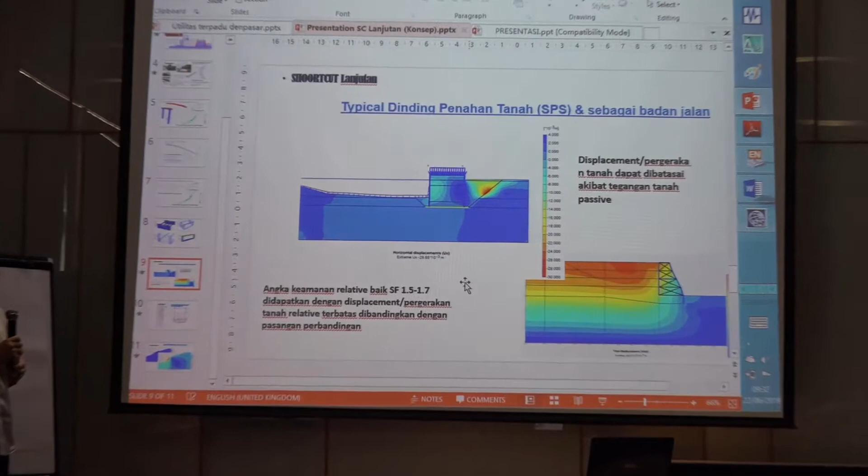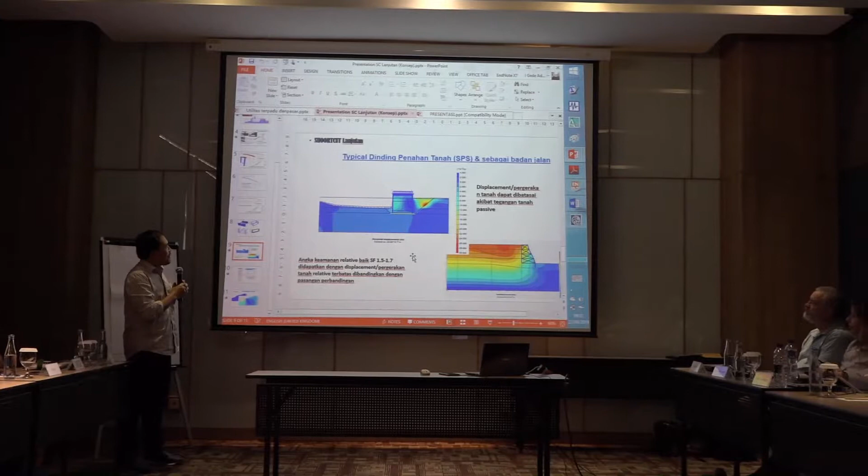Technically, we try to provide the stiffness of a structure. If you look at the basic structure, we also fill in another material, the soil itself, which provides more stiffness.

When we calculate this, the load comes from the lateral load, coming from outside, from the horizontal direction, brought to the structure — meaning the structure has to resist lateral loading, or horizontal loading.

That's the main point. But before that, if we have a frame, we already have a structure. Now the interaction between the soil and the structure itself, and another factor right now is water — that interaction brings more complication.

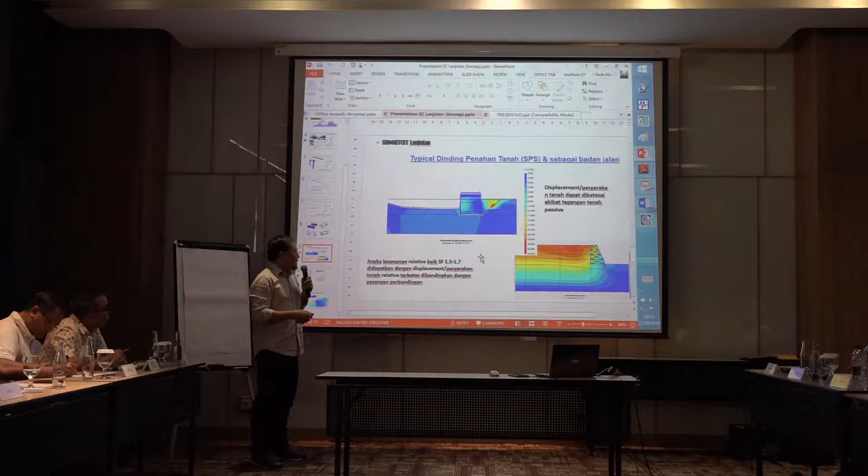We've got software from Europe, from America, from Australia. I think it's quite a massive help for us to explore more about the interaction between the structure itself. Right now, the main point is if we have a vertical load, actually to provide better solutions if we have a lateral load versus a gravity load. We have more loading to the ground, and then the lateral load is much more easy to resist by the structure. That's the main point of this one.

Now, technically, if we look closer regarding the foundation and the deformation we get, that's a different way to look at it. Sometimes we provide another material, like what we got here from Lorry. We bring in another material, like a synthetic material, geotextile, to provide strength, shear strength to the soil, and it would bring another resistance here. That belongs to different cases.

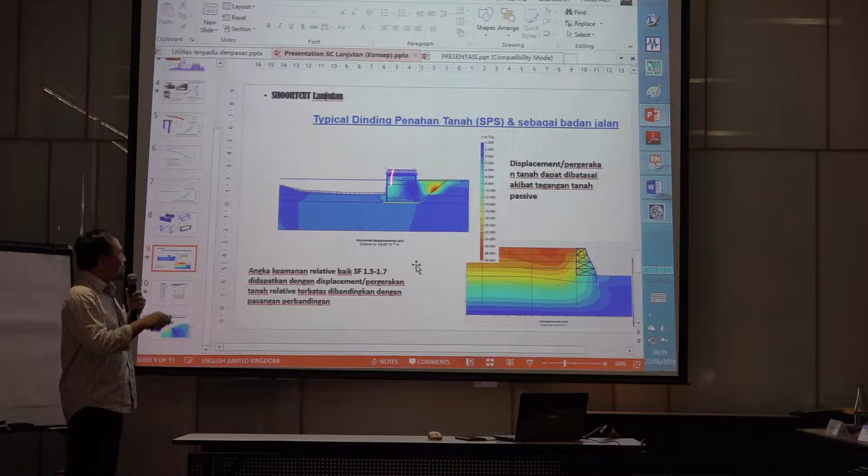For example, here we have a safety factor. That's the stability of the structure, which means the capacity of the structure, represented by a safety factor. The requirement of safety factor for a retaining wall, for example, we just provide 1.5. A bit more than that will bring us to a costly solution - it should be more expensive than we expect. So if we use another safety factor or a limited safety factor, it's a different solution. A bigger safety factor we provide, of course, gives us a more convinced structure.

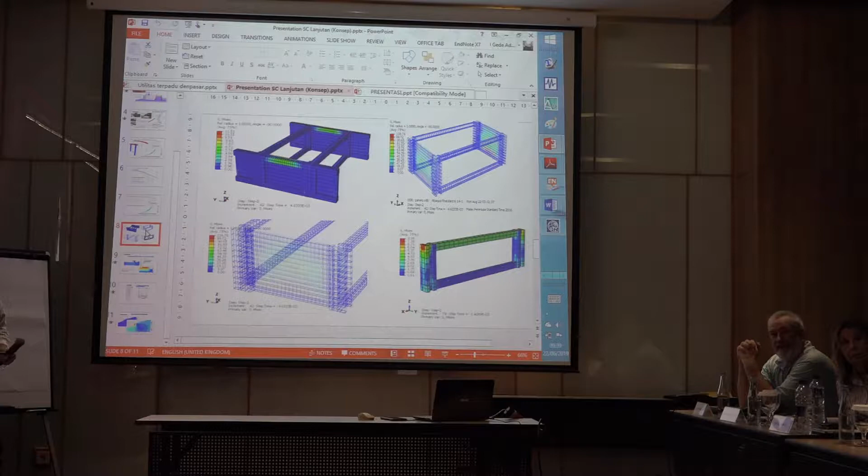So let's move to what we've got here. Now, technically, yes, if people have got any questions, don't lose the translation - we will get this translated, and if you're okay, I can translate. So is there any questions on this? Overall stability of the structure. Overall, yeah, okay. Let me bring it to more general language. Probably - oh, sorry about this.

If we have the structure, the capacity of the structure - let's see, if I stand here, and somebody moves toward me from the other side, I will try to resist that load. That's the main point. If a big guy comes at me, I might collapse, but I try to resist that load. That's as simple as that. So how can I resist someone moving to me? That's my capability or my capacity. We bring in the number here, which is like a standard, a requirement for the structure.

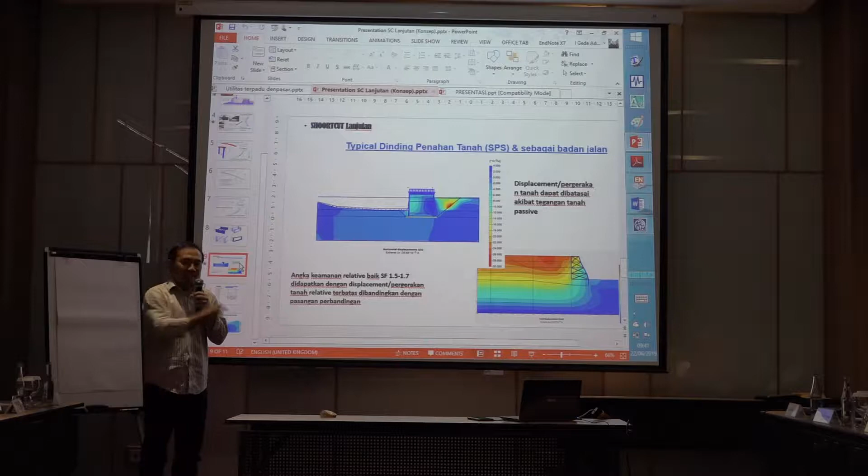Thank you for that. The SF rating, sure, yeah.

That's a good point, because if I look at another product coming in if we apply it to this structure, another advanced material, another advanced collaboration like the analysis as well - we have another opportunity to bring into this structure. If we want to increase this, hopefully it's not more costly. We expect we've got a better capacity, better safety factor, but hopefully we just stay at that cost - I mean, not more expensive than we expect. So hopefully good material comes to this structure.

Hopefully that doesn't increase the cost. Actually, that's a good point as well.

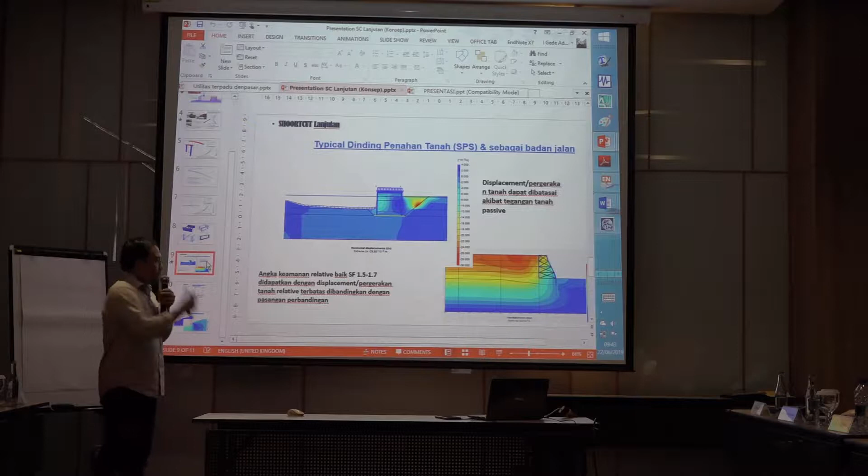So we apply this kind of system with the solution in mind for cost as well as social factors, as Alan said. For example, right now in Bali, we try to provide a solution as a breakwater. We didn't expect to get boulders from natural resources, and we found it's limited now - there's no more big boulders to be put along the coast because they're not provided and not available. So we try to bring this as a solution, and we've done a study on this that we can share. I'll bring it to Alan, from a study about 2-3 months ago in the lab, but I didn't bring it right now, so we'll share it later.

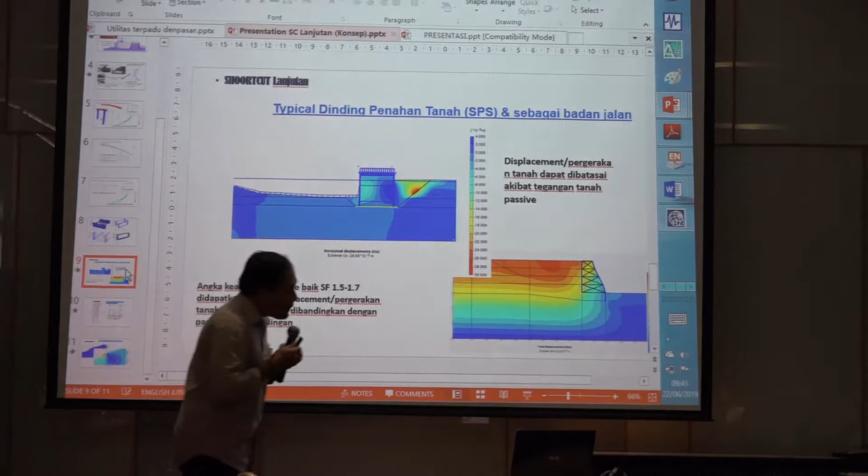So what I'm hearing is the answer is yes, but it comes at a cost. If the cost can be controlled, we need to control the cost. Surely, if we use advanced material, sometimes we go beyond the cost, and then it's probably not quite a good solution. So I think so.

So on the same subject, regarding the safety factor rating - what would that typically be for a gabion or a sheet pile structure? What rating would they be achieving in a traditional installation?

If we compare - you mean a comparison? Yes, so if you have a gabion structure from 10 years ago in Bali, what rating would they have achieved or claimed originally? Okay, that's a great question, because we try to provide a different solution from the existing one. Is that right? Yeah.

The existing solution sometimes has limitations. Like I said before, if we find limited resources to be put as a retaining wall, we try this solution instead. And sometimes, depending on the case, the structure will be a risky one. For example, on a really steep slope of soil, if we put a typical gravity structure, it won't work properly according to engineering requirements. That's probably the background - if this structure is put in, it provides a solution for this.

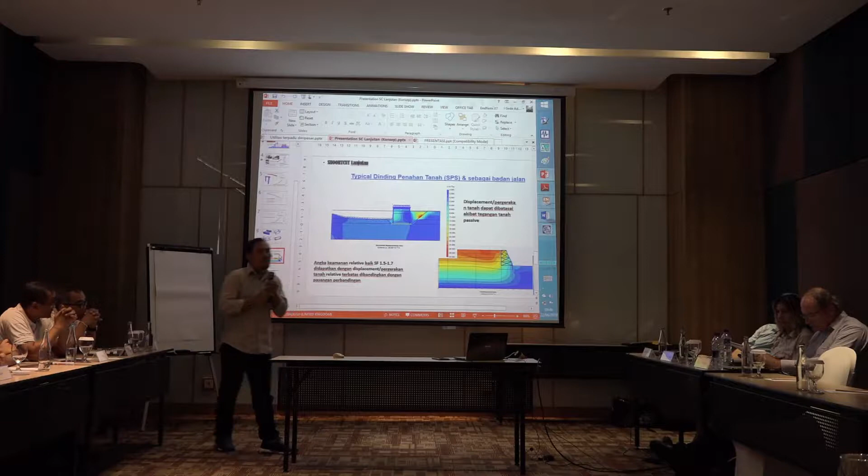Anybody else? Before we continue?

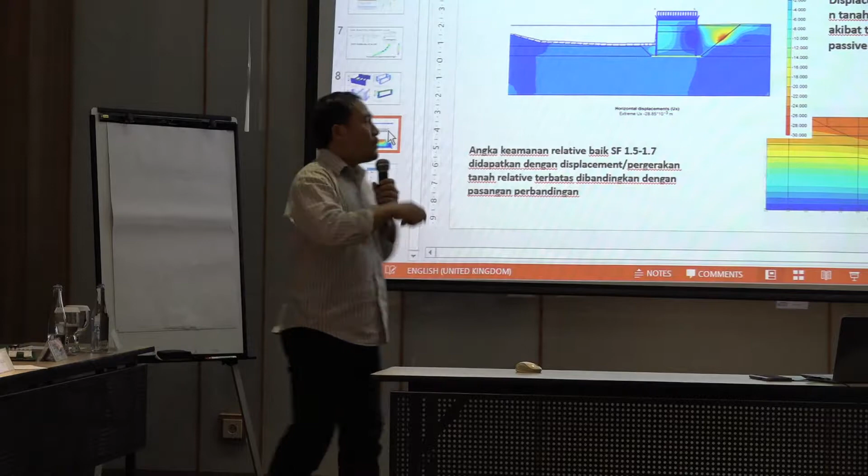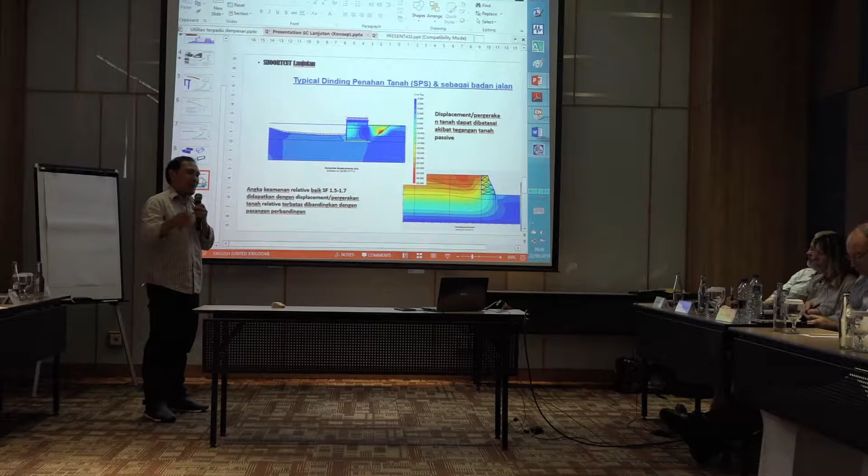I'll try to add, because my colleague is really an expert in soil matters, because this structure depends on soil interaction - the existing soil will make the structure behave differently. It really depends on the soil. So for the safety factor, if we provide the same safety factor compared with SPS, we've got probably the same outcome, however we have a lighter structure, a more reliable structure in terms of stiffness. Sometimes if water will cross or transport from one side to the other, it's a different analysis. The gabion allows water intrusion fairly well, but here, if we want to protect water from coming across to this side, this will help more than the other option. So it depends on the case - we don't expect all cases to need an SPS solution. Not really, but this one is better for certain situations. We try to compare apple to apple, and sometimes it works better, sometimes it's more expensive, and then we might choose another one if this system is more expensive.

To try and compare the two is difficult. A gabion structure with the same safety factor might have twice as much bulk, so you can't just look at one against the other without considering what's going in behind it. For a pile or sheet pile structure, it's quite different again - the piles might have to go, say, if we're going 1.5 metres into the ground, the piles might have to go 5 metres into the ground to obtain the cantilever effect they produce. They're very difficult to do a straight comparison, I believe.

You can do it obviously, but what we're doing here is so simple compared to the other structures. The Gabion structure takes probably a lot longer, I would think, because you've got to carefully place the stones within the cage. In fact, we climbed over a Gabion structure yesterday supporting some of the upper embankment. It's been there for some time, but not down at the lower level, so it's a difficult comparison to make. You've got to look at all aspects. I'm surprised that the safety factor is only 1.5 to 1.7, because the engineers I work with are probably three times that, and they're very cautious.

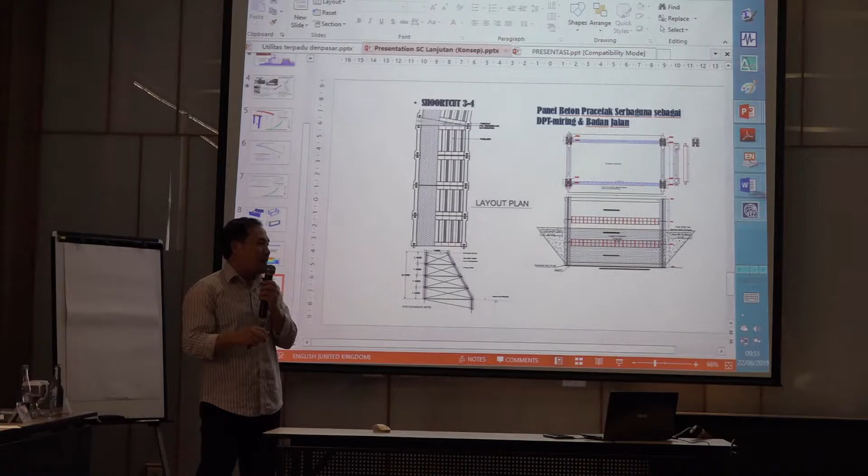Alan made a good point, because this system provides concrete material, which is precast, and the durability of the material itself is quite better than others. For example, let's say the cage of the Gabion lasts about 15 years as the durability of the material, and then corrosion comes up, and the Gabion probably is not working well at the hazard water, like chemicals sometimes. But hopefully this one, because they have a deck, a concrete cover, that's probably a better solution for a hazardous environment. So it's better for that one as well. A longer durability of the material probably takes time, and if you compare the cost, the initial investment up front costs a little bit more, but if the longer structure is a durable structure, this will last longer. It's probably a good solution for the cost as well.

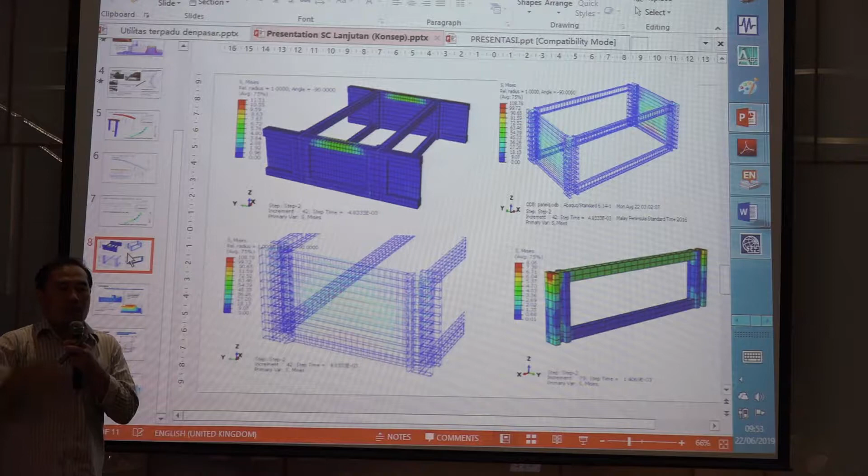This is actually a great thing to show us how the strength, how the stress is working inside of the structure. So we try to go deeper into what Mr. Angara brought us as the challenge here. This was not working as we expected, and we didn't expect to bring you this. So we tried to get inside of the structure. Color provided the stress at the rebar, at the concrete itself. So this brings us confidence for the structure. I think it's a good outcome for now.

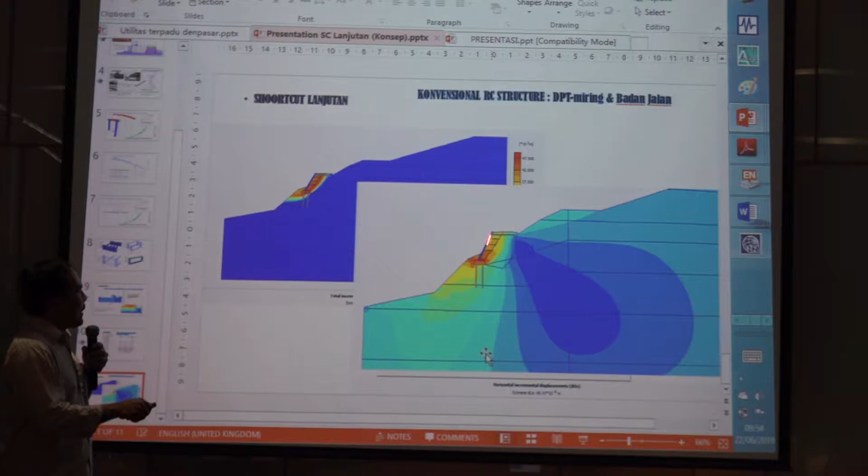Now, if we compare something else, this is a technical comparison before we get into the economical side, like the cost and everything. Last time we had a different structure, using a conventional retaining wall, using concrete and piles. So the method is really hard, and the cost is quite high, sometimes much more expensive. And that's why SPS is suitable for this kind of structure or the problem here.

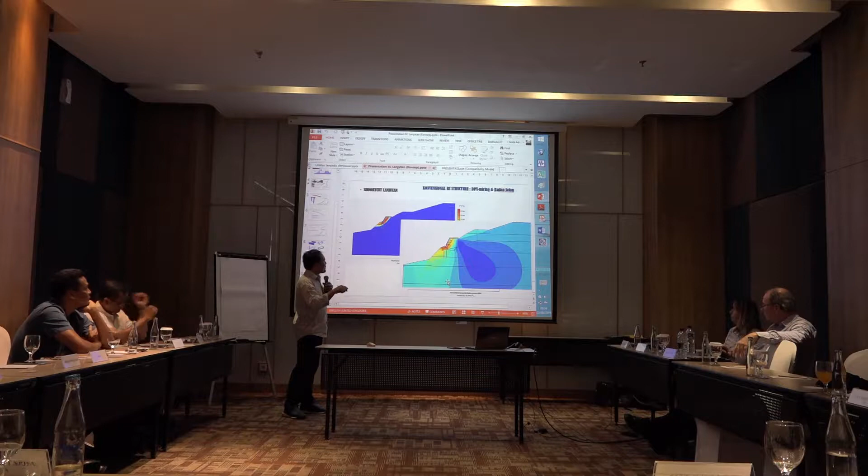So this is the route. The main route will be along that side, perpendicular to the plane, and this is the structure. If we have a good solution for additional land to be built, it's a good solution for the social aspect as well. So I think this is the main structure as SPS, and it's worked up to now. That's a good point as well.

So right now in Indonesia, they're trying to get a specific standard, what we call a standard. They're trying to provide the standard for SPS right now. I mean, the SPS team tried to contact the authority to provide the specification in order to bring SPS to be constructed all over the Indonesian area, so they get the standard, sign, or stamp from the government. If they get it, I think the consultation is already there. It means we just need to provide monitoring or control of the structure.

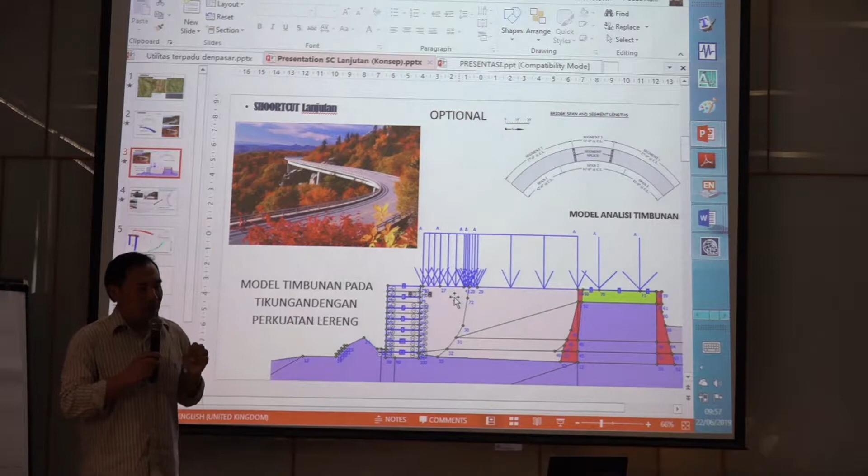I mean the previous structure, or the structure installed last, we try to provide control and monitoring. The result of the monitoring we need to provide to the government, and they will stamp it, and then the government asks the industry audience in Indonesia to bring it into a solution for everyone in Indonesia. It's not just local in Bali, but probably they'll bring it to all over the Indonesia area. So I think it's a good point.

But what about... this is the case again. I'm very sorry for... probably you look at this one, that's better.

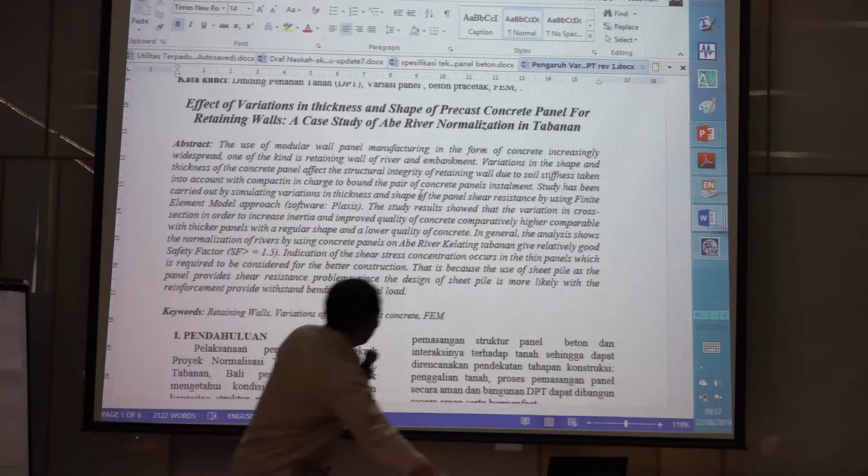Language for you, probably. We have an analysis or publication regarding the effect of variation of thickness and the shape of the precast concrete panel for the retaining wall of the river. Abe River is a good point for us. This kind of structure is put on the river bank. Actually, the river is about 20 meters wide, and we change this kind of structure. This is the existing structure to be put, and we try to provide another solution like SPS. So this is the comparison between the structures.

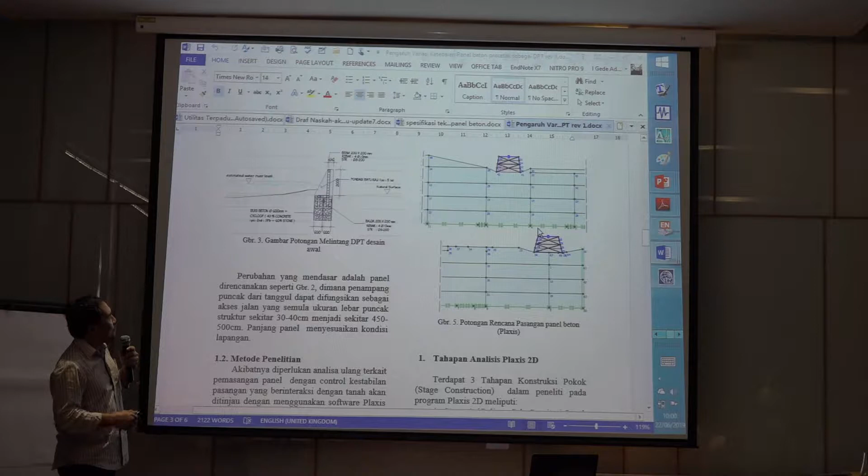Structure, as you've seen in Ali's slides, it's just like a hollow. It just looks like a hollow because of some panels, truss, cables and everything over there. So what is inside that system?

We need soil. Soil material will be filled into that system, into the chamber, small chamber over there, in that body. So what is inside the system? It cannot be just empty like this, so we need to put soils or any material.

A selected soil will be good, but we try to find the most suitable option. We can use any soils, just surrounding the area, the site, so we can use that as long as we have it.

Actually, we have some projects back then in 2015. The first time Anggara recruited me into this system, we had a proving ground in Karawang Regency in West Java. We tried to normalize the river bank. There's a problem over there.

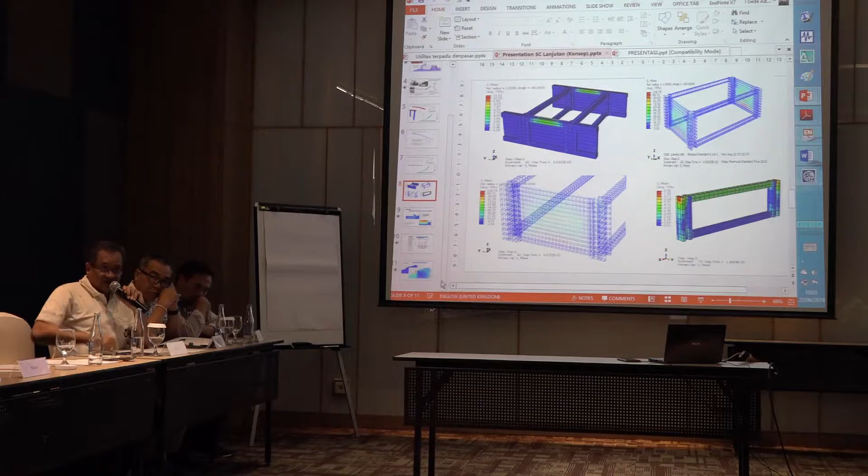So we talk about settlements. When we put this system on the soil layers, probably someday there will be a settlement. We cannot guarantee the system will sit on top and there's no movement vertically or to the other directions, X, Y, Z. When we talk 3D, we have thoughts about Z, X, and Y. So there probably is movement in that direction, and we need to know about that as well.

When we talk about this structure, I think my colleague Padi already explained everything, he's the man who knows the tiniest thing about this system, you can ask him. In terms of geotechnical engineering, to support this structure we need to know the sufficient bearing capacity of the soil that the structure will sit on. That's the additional thing we need to consider.

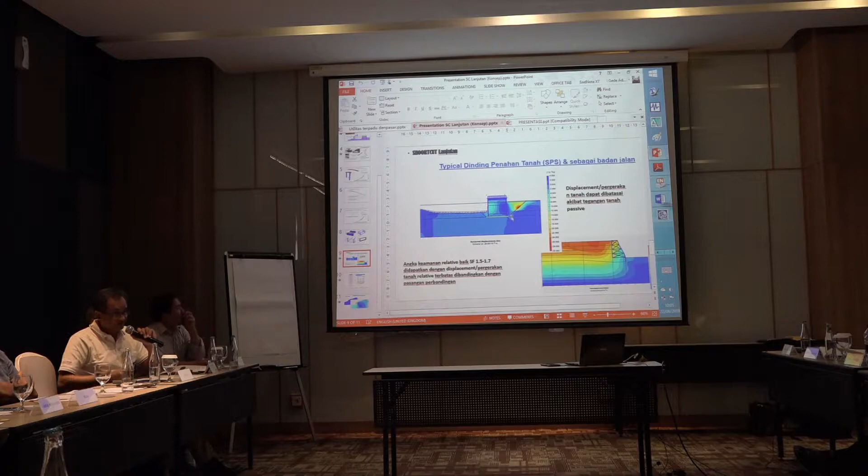And about the fill-in material we have - will you make sure I understand what you're saying? Do other things rather than make it wider. So we try to improve the soil layer, put geogrids, put piles and everything, so that can be done, so that we don't have problems.

So your solution will probably be an economic decision. Exactly right.

Other things about the key issue in this panel system, we need to compact the soil inside the box. The compaction is very, very critical because it's going to give the weight of the total structure and also to try to make it intact.

Because this cross section will continue in the long section to that direction, we need to make sure the weight of this block is similar, uniform along the long section. This keeps the stiffness of the long section, so it controls the tilt and also the differential settlements to this area, to this direction or to this direction. So we need to make sure also about the compaction inside the box.

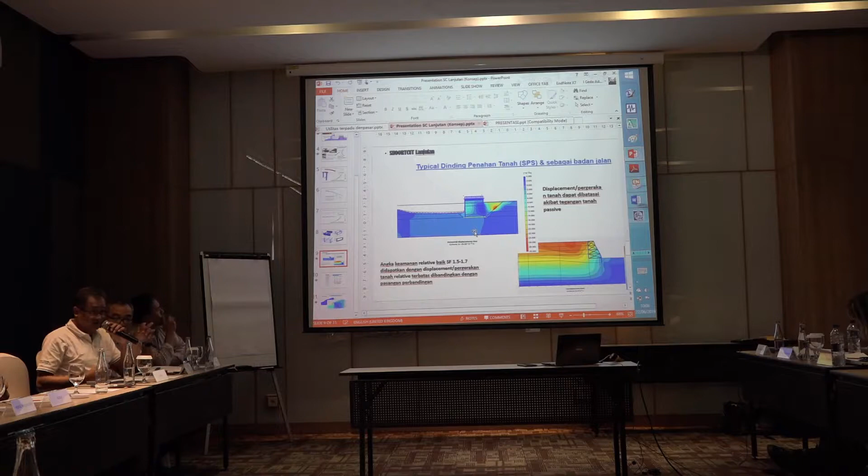Other thing is we also need to check all this work, the compaction work, with laboratory exercises, and then compare it to what we have together, and the soil changes underneath.

How do you keep the rigidity so that it doesn't drop in one place and it's all solid throughout? First of all, we need to know where this structure will sit, so we know which part will have sufficient bearing capacity, and which part needs to be improved to get the same bearing capacity. We need to know that first, and then we can take action.

So let's say in some part we have a very low bearing capacity, we do the improvement. Another material, like the soil itself, brings us greater strength after compaction.

Layer per layer compaction provides us more convenient stiffness and shear strength of the structure, as my colleague said last time. Bearing capacity and shear capacity of the structure will bring more confidence to the structure. That's a good point for us.

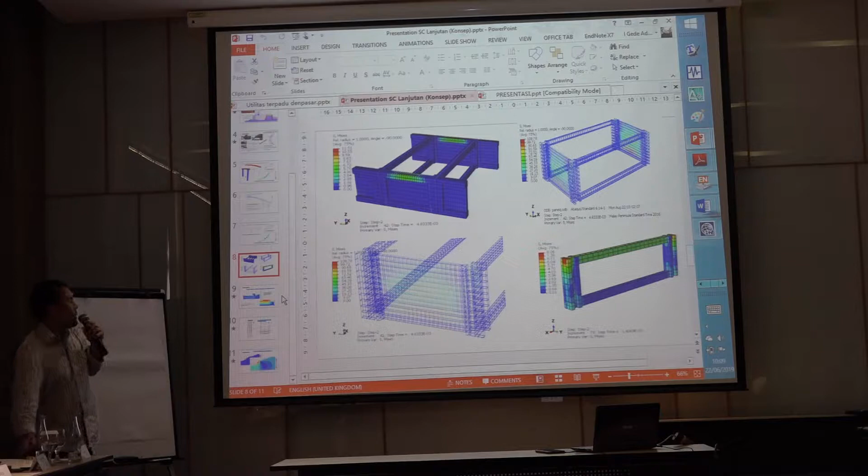And then again, if we try to provide analysis like we call right now soil structure interaction, I mean the interaction between the soil and the structure, that's a good point for us. But now again we have a fluid structure interaction, so we're treating soil, fluid, and the structure itself made of concrete.

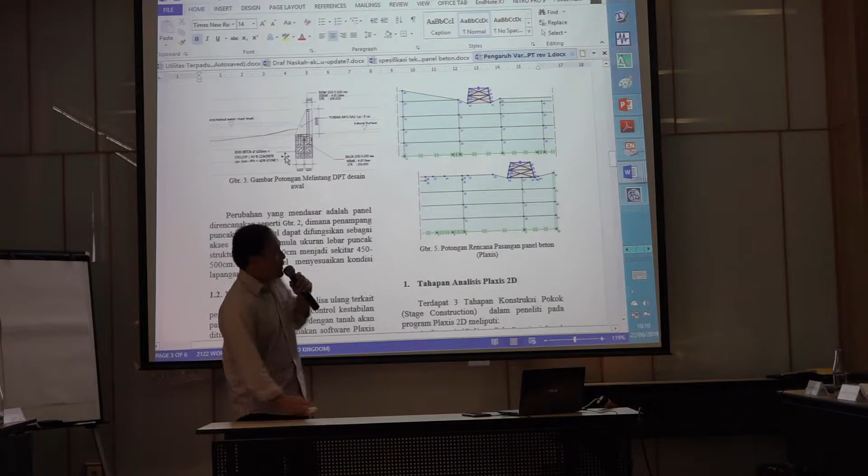That's a good point for us to look at this kind of structure as a challenge to bring more. And then another interaction is coming from the flood, like the fluid interaction. We have different stage construction scenarios, which is case by case. We try to provide analysis as...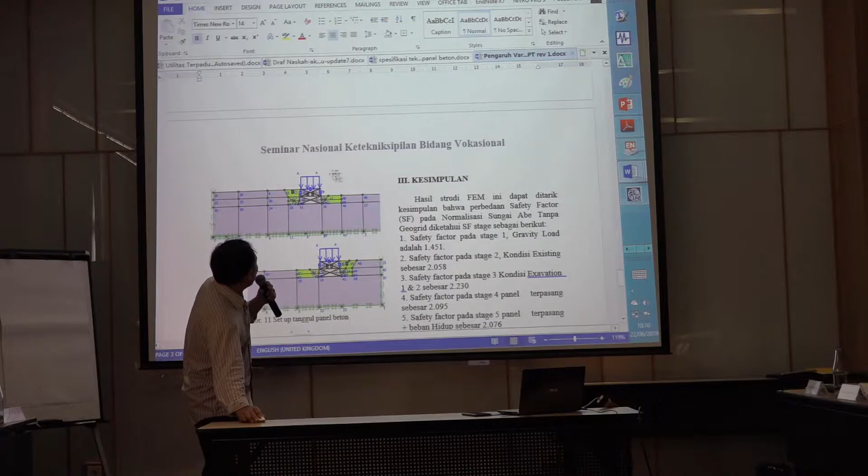We bring it like this one. So first step, for example, using a gravity one, how they try to put the excavation, they try to fill the structure in compaction up to the total structure setup, totally, and then bring additional load here, how it will work, and then how the structure performs, and then we will look at the...

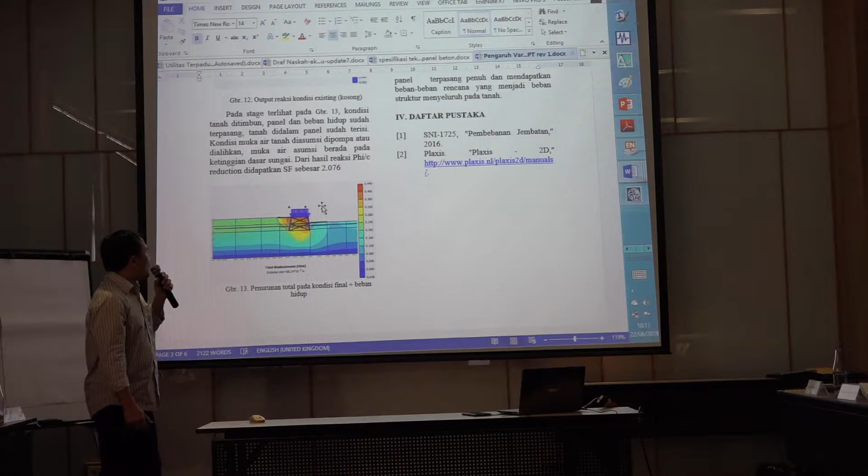Behavior of the structure under the extreme load. For example, the extreme load what we expect, like the flooding there, and then another flood from outside itself. Of course we include the additional load, for example the transportation load or truck and everything.

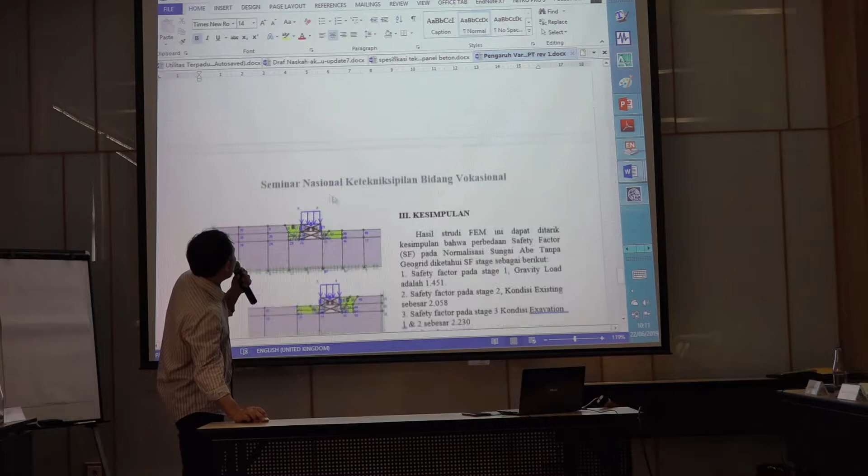So the good point here is we try to work using stage construction, step-by-step construction when using this kind of structure. We'll start from when we dig the soil, and then we check the bearing capacity of the soil, and then the solution probably using synthetic material, and then wherever it works with the soil, and then we bring the panel, we bring the print and everything step by step. So we call this stage analysis here.

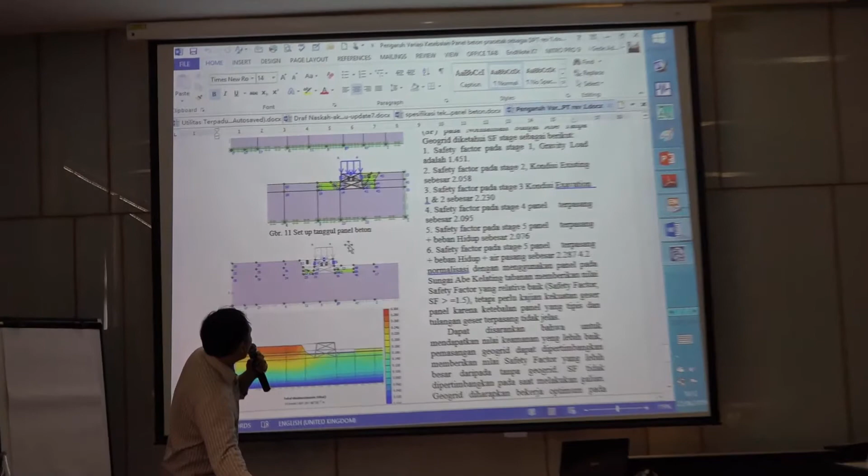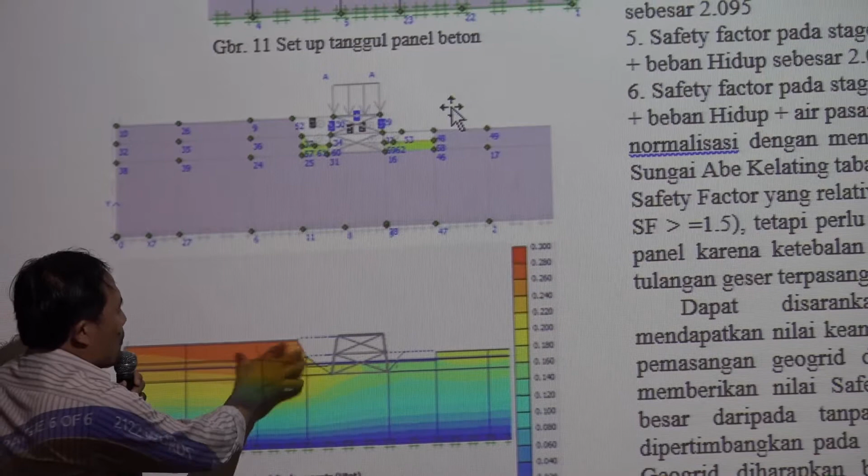For example, what about the empty soil there? Which means if we dig or make an excavation, what about the soil here? How is the interaction of the surrounding - for example, if we take out the soil here - and then we have analysis there, which means the risk we expect to find here. Probably we need to provide additional retaining there before the complete structure is set.

That's a point here, so we have to bring the safety factor per stage as well. I mean, the first stage we provide, for example, gravity load there. The first one - if we look at the gravity loading, the safety factor provided is 1.4 or something, and safety factor from stage 2, which is the existing condition.

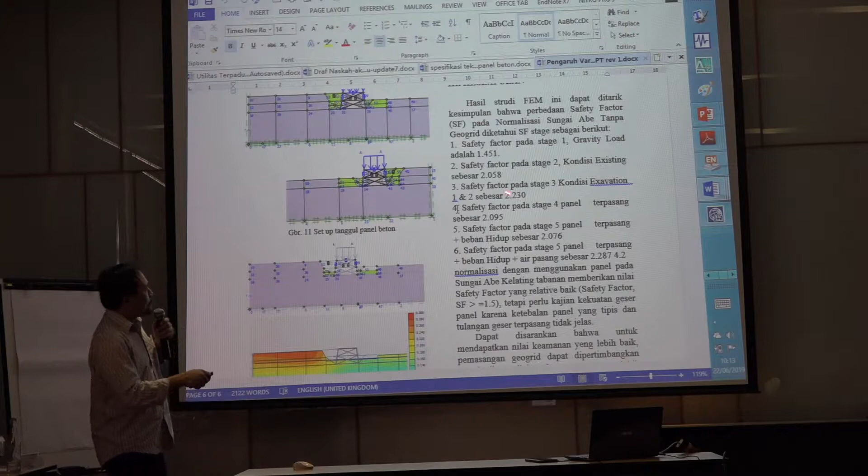We have almost 2 there, and then the condition where we do excavation - first excavation, second excavation - we provide a safety factor like 2 or something, and then the other if the whole panel is put, and then we bring it, safety factor again so like that 2, and then another loading to be put there, we still have a 2 point something as safety factor.

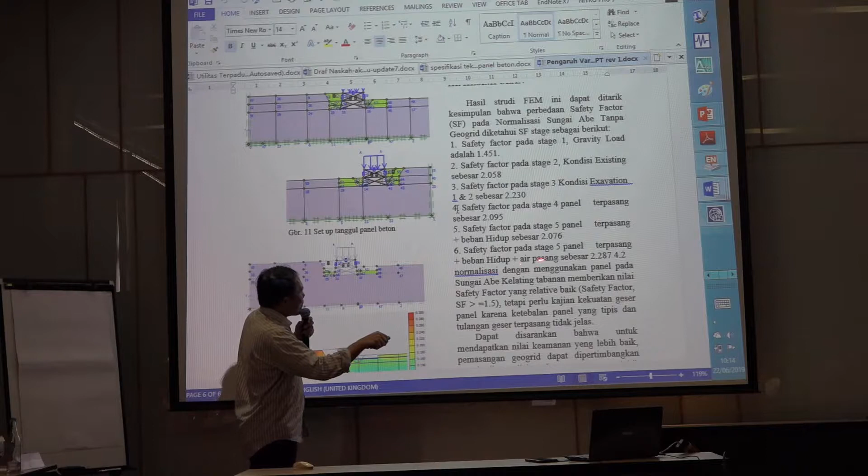And then if we have another scenario, the last scenario there, using loading there and then increasing water, which means the flood over there, we still have a safety factor quite convincing, which is more than 1.5. That's a technical analysis. We bring it to the audience in order to know a bit more how the performance...

Of the structure. And then probably next time, because I'm expecting a result from laboratory test, we're using wave, tidal energy, tidal loading to the structure. That's we expect to be a bit more presentation for this one.

So, and last time I tried to provide the analysis itself. So regarding to the 22 meter, the problem is not relating to the structure, but we've got a problem with the soil.

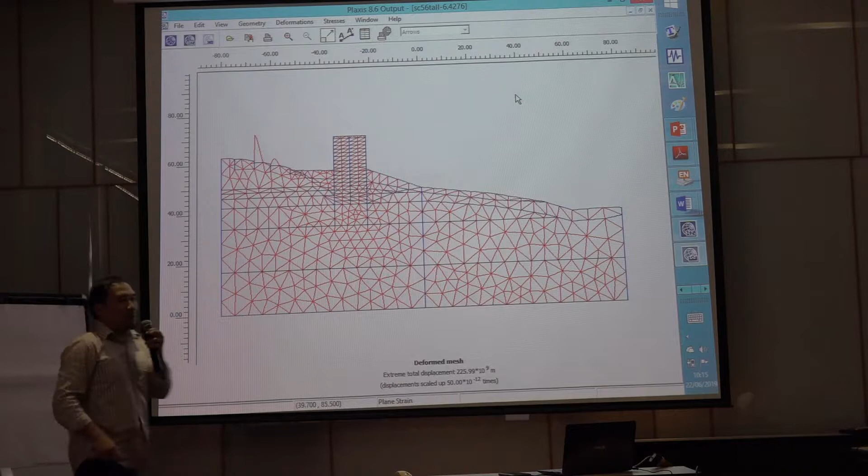Actually, we expect this looks like this one. The color itself is not - it's really annoying - which means this analysis, the blue color, which is, it's not movement there. But if you look at the number there, which is beyond we expect, I mean this is the worst deformation over there.

So where does that come from? It will be here. So if you look closer, that will be here, the number, big number here. I mean, it's really a big number. It's in progress, it's not in the SPS.

That's why we bring our solution, and this is a different solution because the solution is - this is the road actually, I mean our main road, national road, highway actually. We try to provide...

Support structure using pile, for example, because I don't want problems to the structure. Not all problems will be solved by the SPS, so we bring in another material, another structure, another technology.

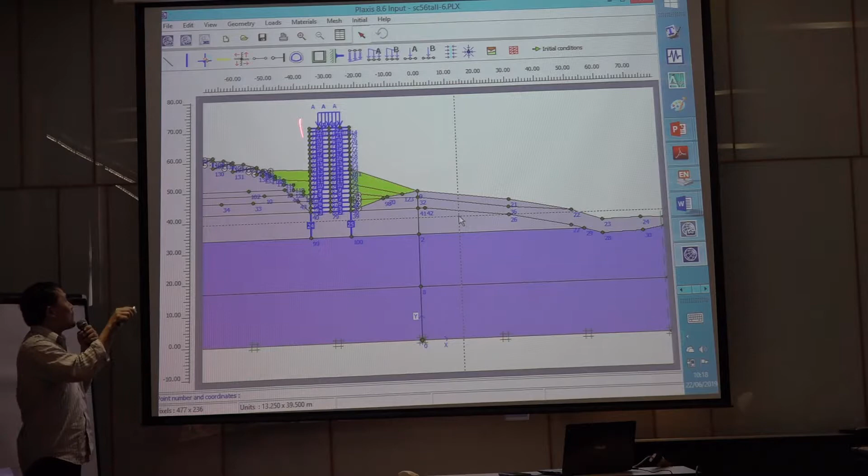In this case, the stratification of the soil is really soft soil. We didn't bring the contact structure here, so we try to improve the structure underneath the soil, underneath the structure, and introduce a pile layer in order to bring reliability of vertical and also uplift.

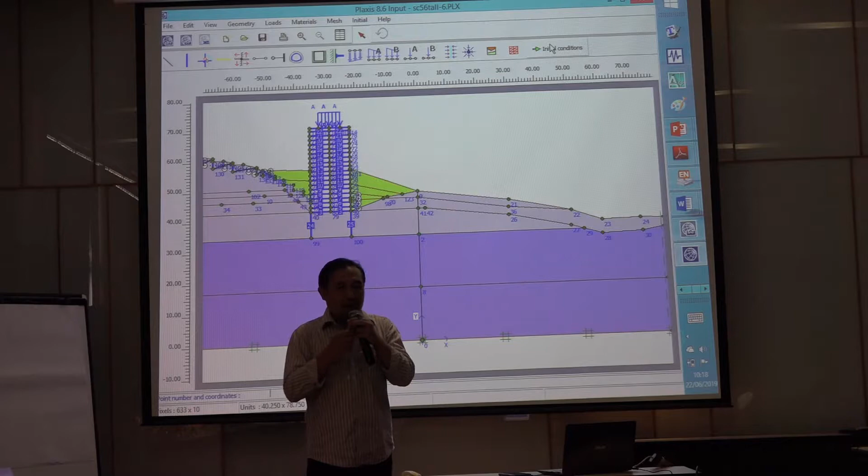This is the solution for this one. Hopefully it will be working up to 40 years. That's what we expect, and our government tries to provide a good reliable structure in our country.

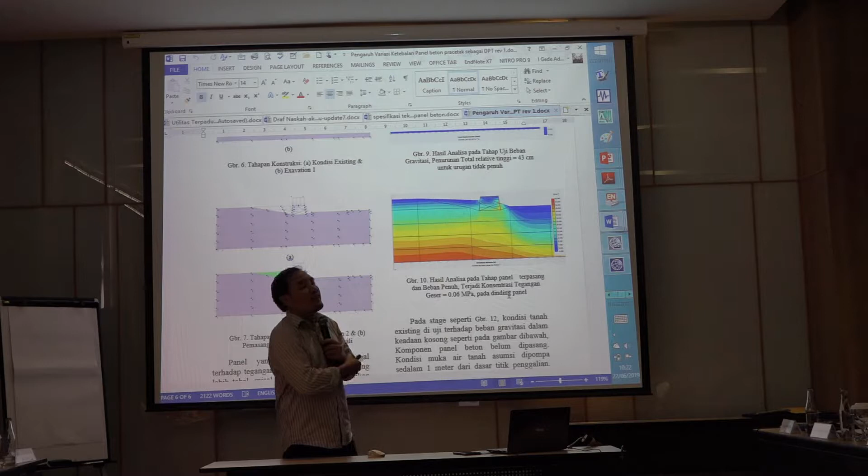The water intrusion from underneath the structure should be a natural thing. Of course, the water will be trapped inside of the structure. That's what I mean, but we didn't expect the water would be hazardous to the structure.

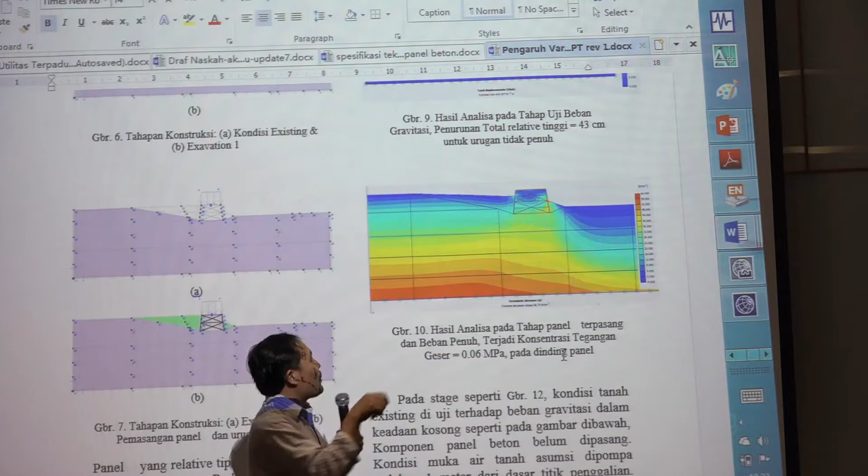The water itself using its weight is good for the structure, but we didn't expect if water transports through and flows to that side, the material layers would come out from the structure. We have to protect the material inside of the structure.

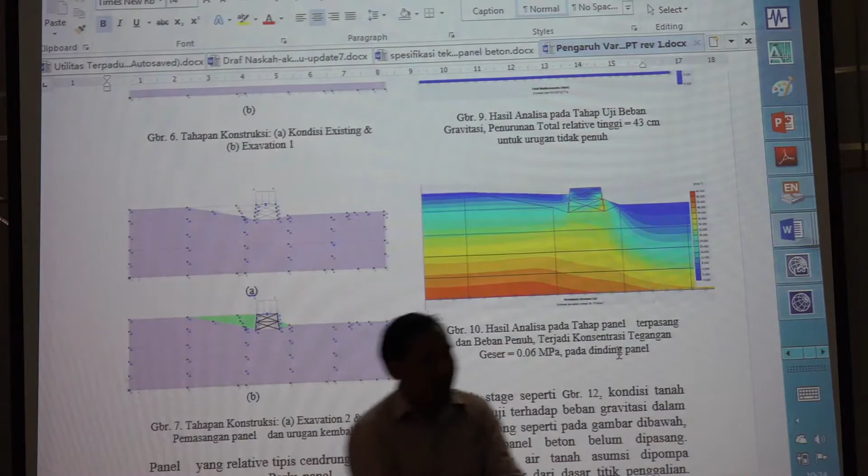Please. So, yeah, and total waterproofing.

And that's the question Alan asked: so are you saying that the structure, to maintain its integrity and stability, some water is permitted to flow through the structure, provided that the material inside does not leak out? That's what you're saying? Yes. Thank you, very clear. I'm sorry my explanation is not as good as yours.

A supplementary question: if it doesn't flow out, what about underneath? Are you saying in tilted-up structures, if it's compacted soil inside, what do you do with the base? If there's water in there, why doesn't the soil come out the bottom? Because last time in our project we talked about protection.

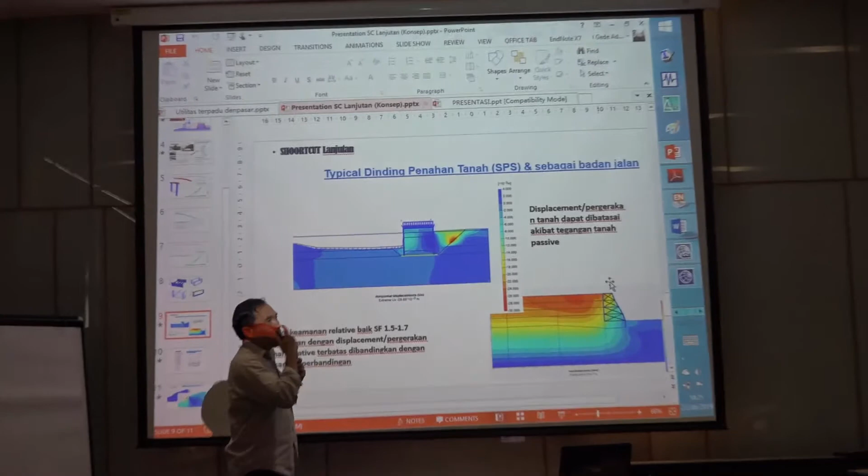You see here, we have synthetic material to be put in, providing bearing capacity, additional bearing capacity, and we put another one, a geotextile, which is a very tiny material of soil. We protect it from penetration or permeability of the water, so leaking out will be avoided by the geotextile. That's why we sometimes use two materials.

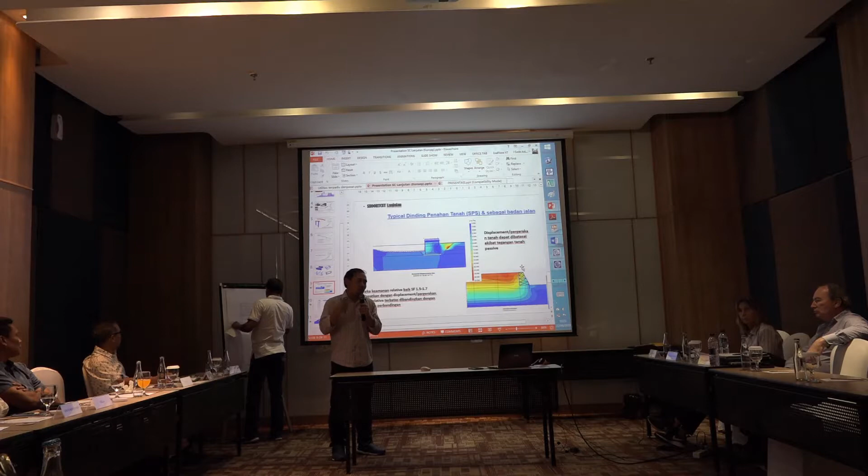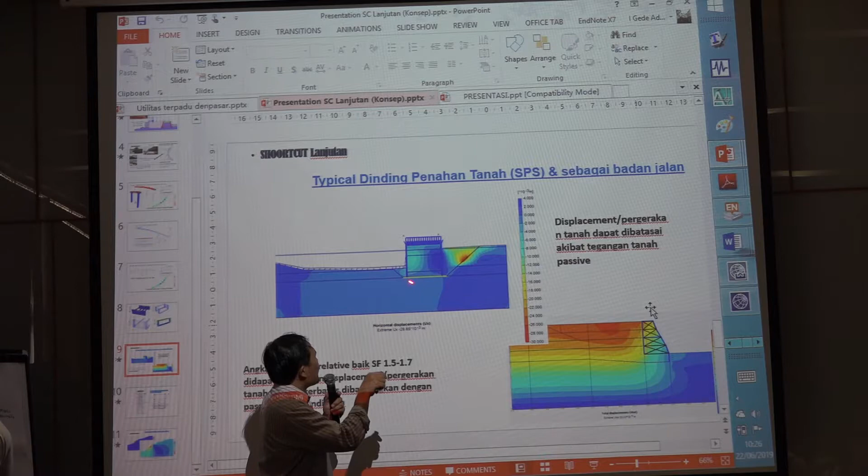The base sometimes, others put it all around the perimeter of the structure. We protect the material from leaking or coming out -- another solution in order to provide bearing capacity, all together, providing better bearing capacity as well as protecting material from coming out using geotextile. That's good, so I think--

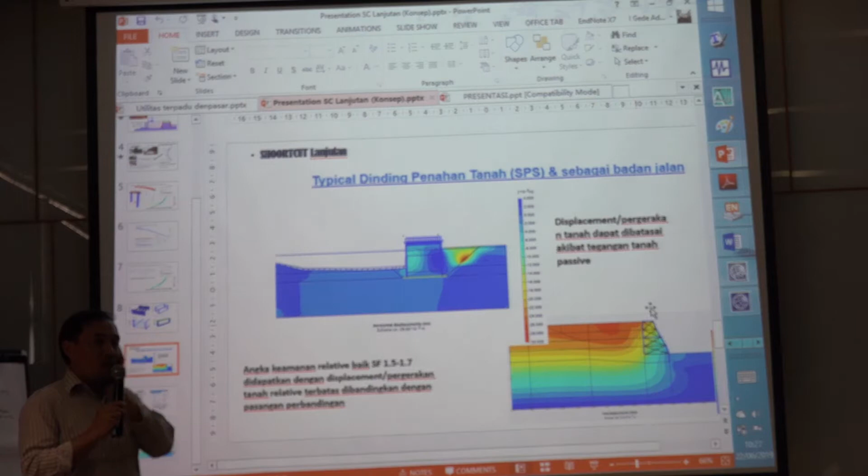Further to that question about the base: is the textile material at the base of the structure designed to be pliable, to mold into the surface where it sits?

Sometimes yes, we probably could use a stiffness slab, for example, which is a stiff material. We can do that, probably much better.

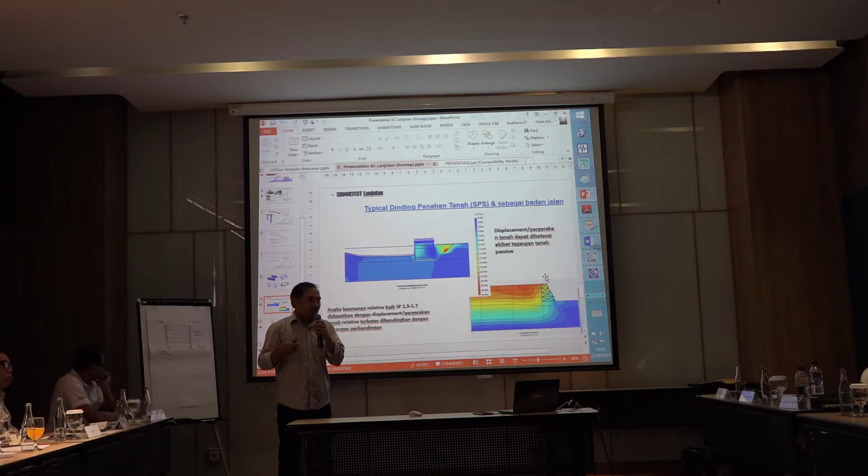The thing is, if we provide geotextile, it's a product that provides tensile strength, really provides shear strength to the structure. This structure will be sinking actually, but this material will protect it from sinking because they have tension strength.

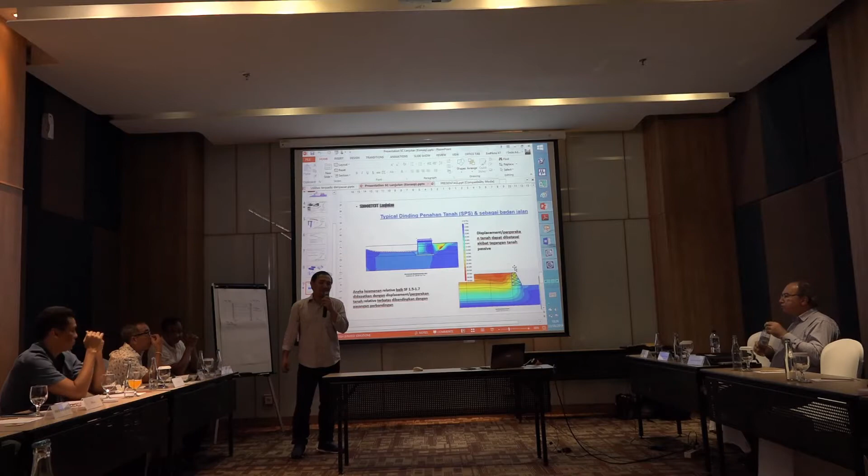That's good, so there is some opportunity for different designs of the base. For example, if you had a corrugated base, you increase the surface adhesion to the base, and you increase the integrity laterally and longitudinally. I think it's a good point for us right now. You bring a different idea, and then you can improve the structure by using this. We patented that, incidentally.

Issues about the base of the structure: when water flows to the base, it's a doomsday. It's gone. Everything will be gone.

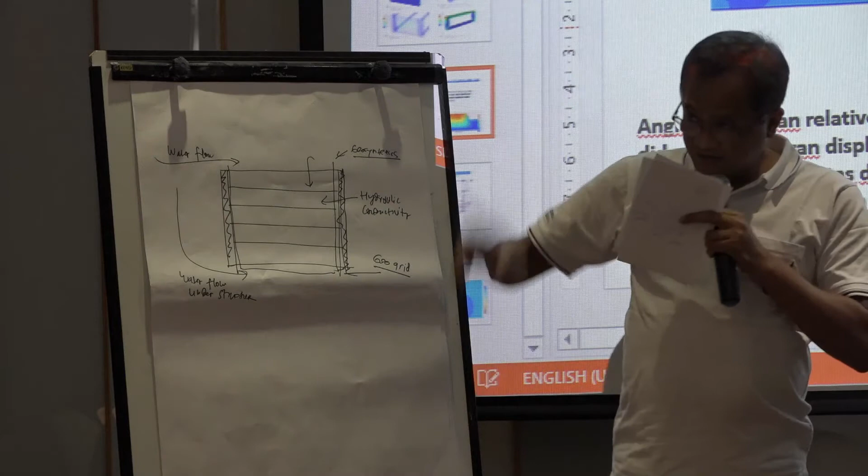We had this experience when we worked in 2015 in Karawang, West Java. We had this kind of problem. So what should we do? We try to protect, so we don't let the water flow in. How? We put another structure. Can we put another structure when the situation is very specific or unique?

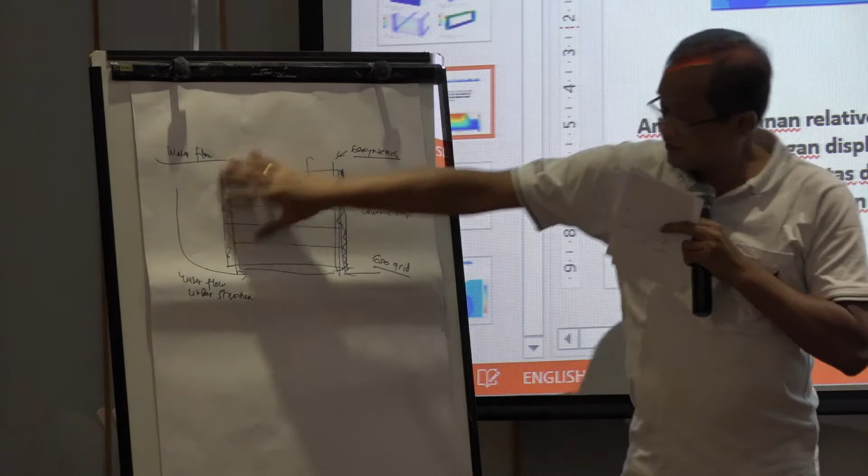When the water flows to the base, we have an uplift pressure here. We have a lateral force because of the water. So there will be an additional force that might destroy this structure. We try to keep this force in check, and then we try to do something else, put another structure, or maybe improve the soil to prevent water flowing to the base of this structure.

What about the inside one? The water may flow over the structure. When you put this structure beneath the water table or water surface, the water will flow on top of this structure. How do we prevent the water from penetrating into this segment here?

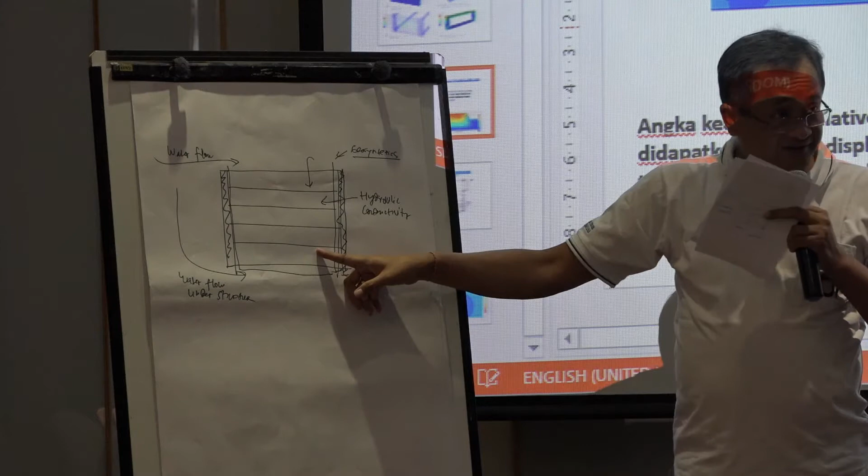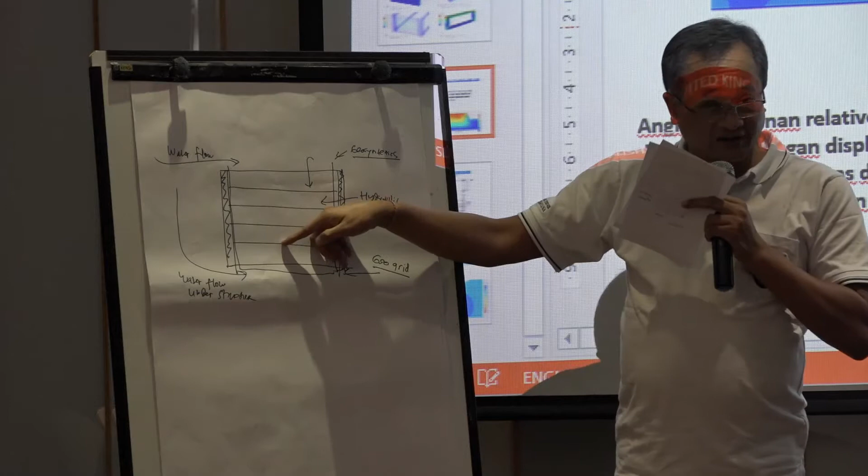We do the compaction. As I said before, compaction not only increases the weight of the soil here, but also reduces the hydraulic conductivity of the soil. It means that when we reduce the hydraulic conductivity of the soil, the chance for water to penetrate into the soil is less.

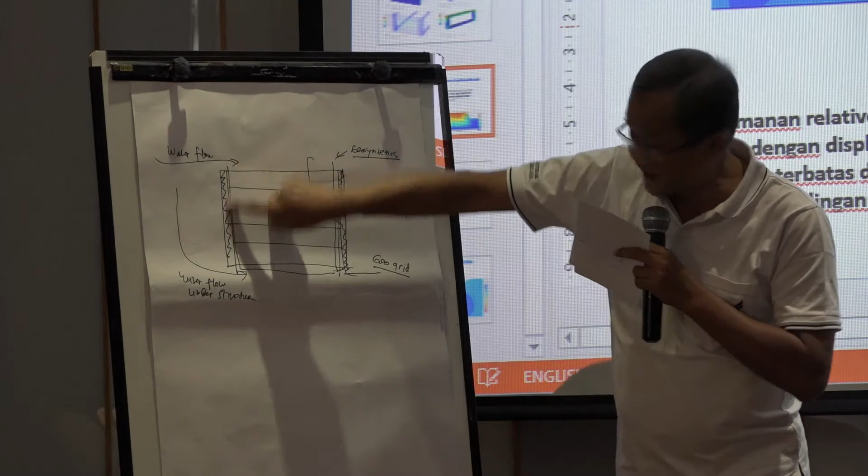That's how we provide it, so there will be no additional water, or at least we can reduce water penetrating into this hollow. That's how we work on it. And what about when the water comes out? Because we probably still don't have a watertight structure here, the water may flow up to that direction.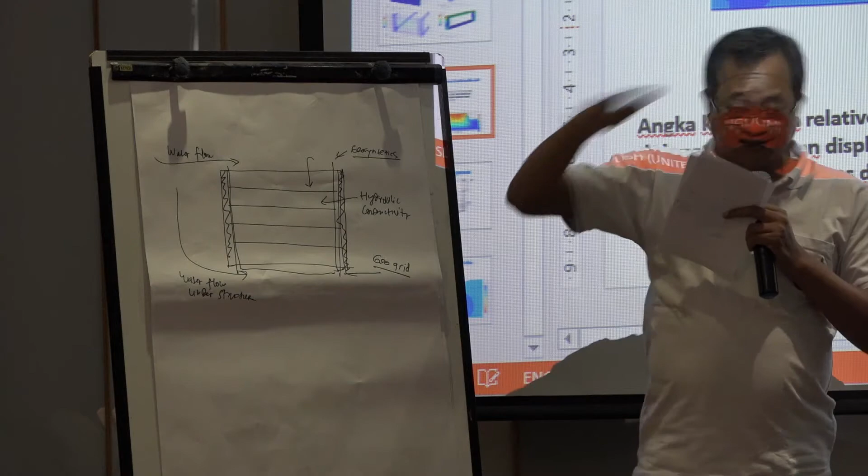Yes, we can put geosynthetics in some parts if we need to. When we're not working on the water, we can forget about the geosynthetics. So we can wrap the soil, then compact the soil, and put another layer of geosynthetics, and do this up to the top, covering the surface of this compacted soil.

That's how we can make the water not penetrate into the soil.

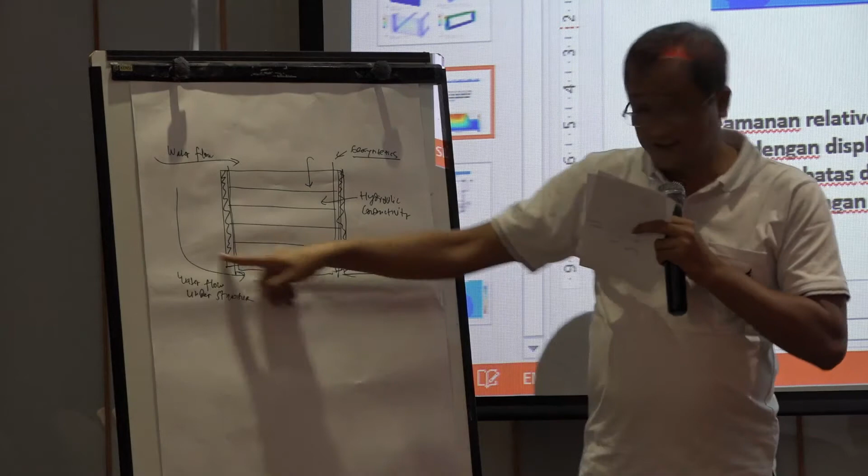The most important thing, as you're concerned about, is that this is not an easy thing to do because you cannot put a stop sign to the water. They will flow in any direction. That's why we need to really understand what is the soil just beneath this structure, and what is the hydraulic conductivity of the soil, so that we need to study more about this situation.

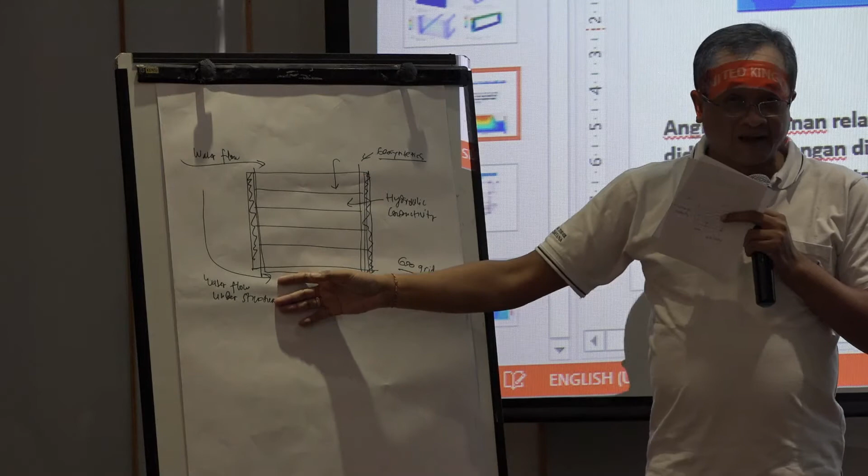And this situation is not common everywhere, but sometimes it's only one spot, not all the way along. So we need to sit down and study the soil, do site investigation and soil investigation, and then find the solution. Thank you. So that's our system here. If you have any question or discussion, let's talk.

How do you keep the water out of the ground? I've got people in Australia who do not believe we can keep the water out, and similarly, to stop the water getting in. The thing that, when I talk to people, they have trouble understanding is how the water can be kept out of the structure when they're working in the water. Well, there are two parts: when they're working in the water, but also when the water's there, they just don't understand why it doesn't penetrate the ground or create a problem.

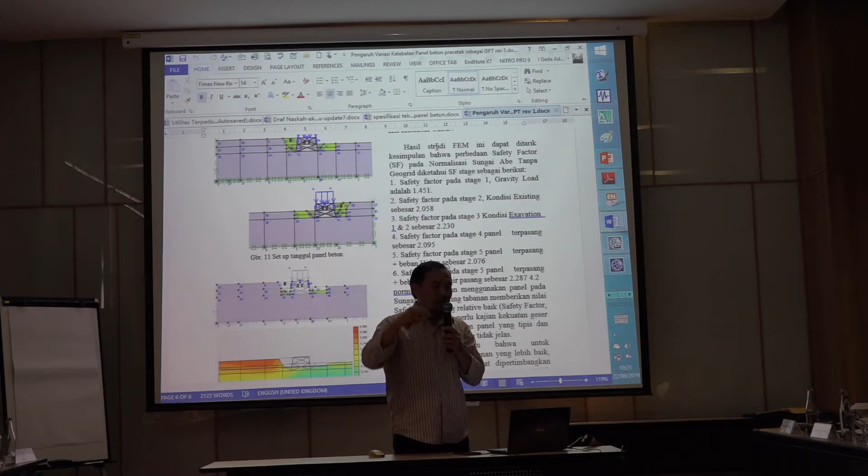Okay, great, I think it's a very good point, this should be a skeptical question. Actually, yes, that's a great question because it's really a technical one. The water is not protected like a waterproof structure, not like that. So the water actually can pass through sometimes, or if you want to protect it like a waterproof, you probably can do that. But for the relief structure, we try to let the water pass the structure, because sometimes the main point is we don't want to bring the material inside of the structure out.

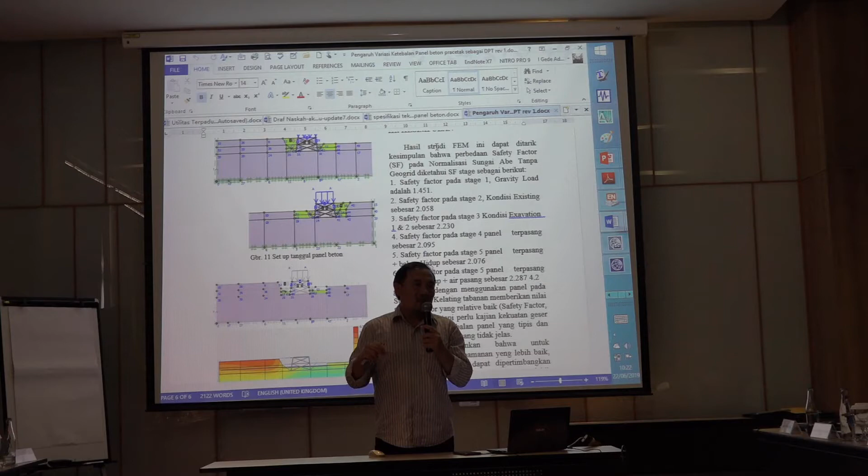That's the point. If the water is like a transportation media, it flows from this side to that side - it's normal, natural flow. If we put material on the river and don't expect to protect the flow of water, the water will pass the structure, hopefully the inside of the structure will be passed as well by the water, but not using velocity which is quite fast, like a flood.

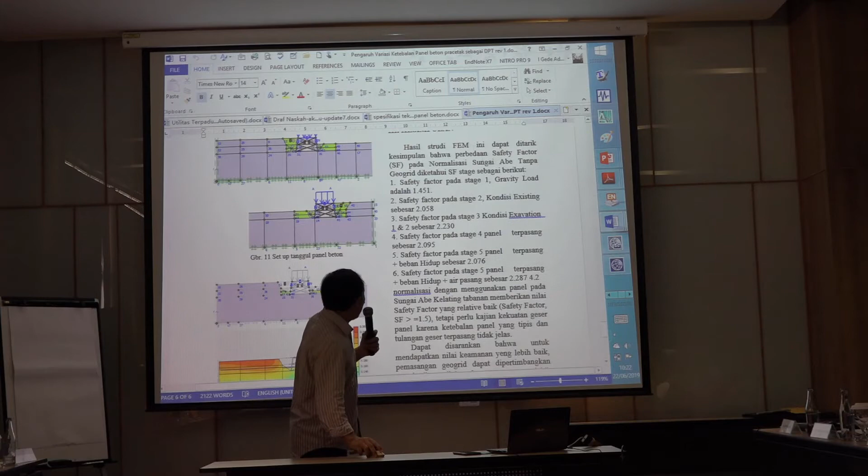Soil - they will understand about this kind of problem. So we don't want failures anywhere for anyone. But you have years of experience. Why would we go anywhere else?

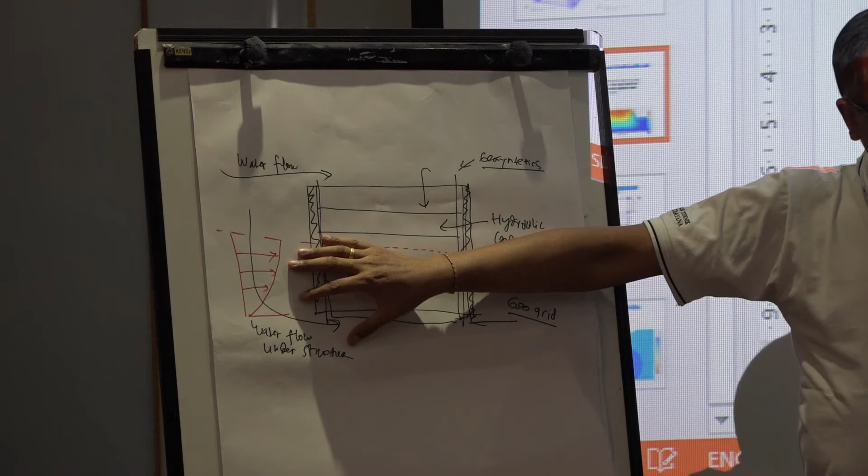During that time, even the owner said, 'Why has this happened? Why is this?' And then we tried to find the solution, and we went through that.

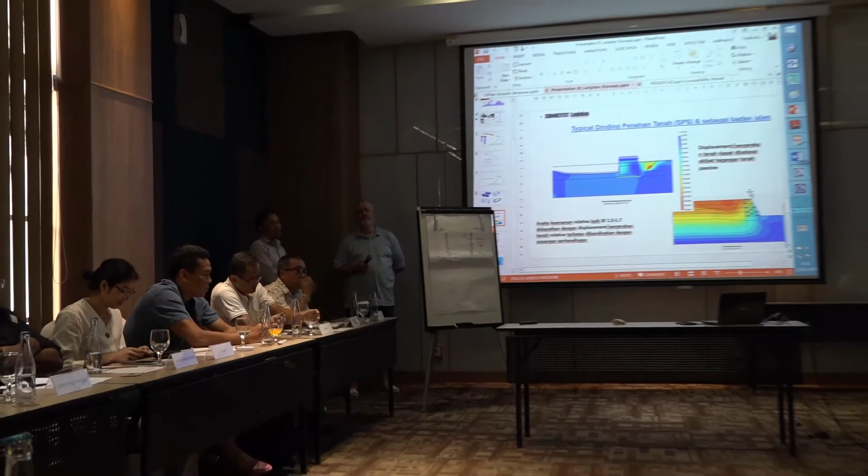One reference used this morning raised a question: if that material is so prolific around the world, particularly in this part of the world, could it be used in place of the concrete panels? That was the first question. The second is whether other materials besides concrete could be used for the panels, keeping in mind the economic factor. Graphene is one of the most prolific and strongest substances around, and it can be used as a compound with other materials to increase the rigidity and presumably the integrity of the panels.

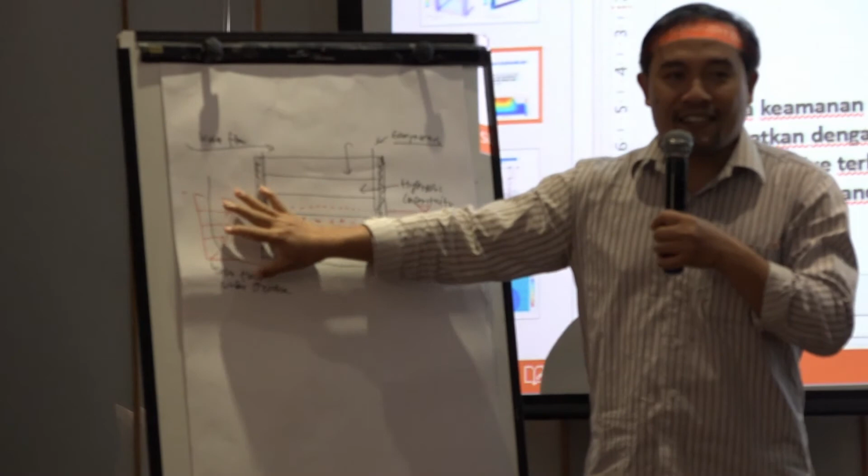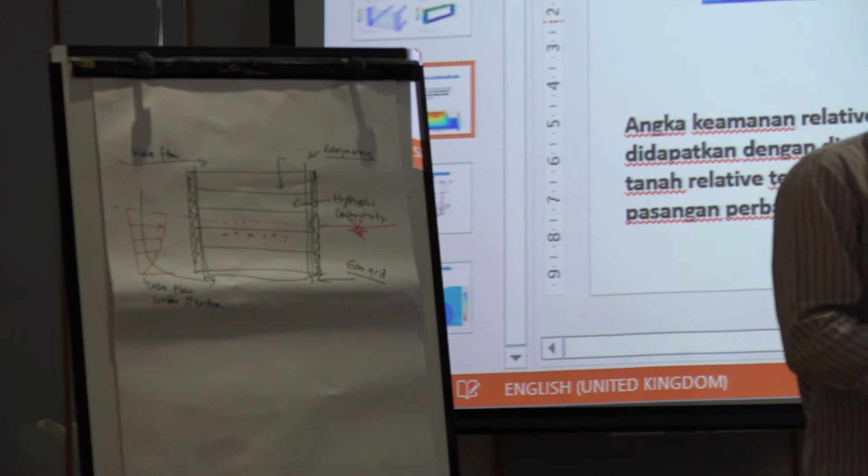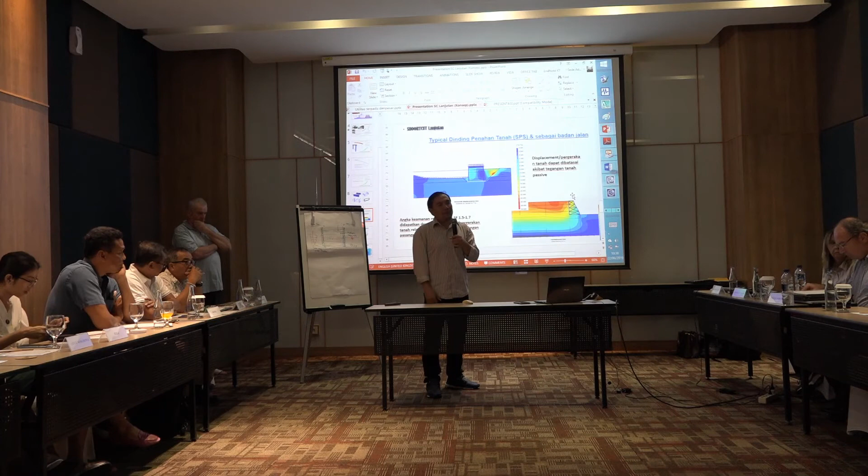It's a good point, that's exactly what I expected. But regarding your question, how does this material bring us more protection against corrosion? That's a good point for us, because the corrosive environment causes mechanical degradation to our structure. We have to study and calculate using this material, and the strength provided is probably better. We expect to use that in order to improve our structure.

Another thing - if we change the concrete by using graphene, for example, graphene is really a strong material. My background is from Manchester, which is the research center of graphene, and today it's even used as a bulletproof material. But it's not quite like that here - I think if you're using a polymer, it's probably better performance for this, because that's the cheapest material we expect to use here.

It's a good point sometimes, in a developing country like this one. But of course, you mentioned advanced material - that's really a great material. If we could get it easily and more cheaply than what we have, of course we'd expect to use it to provide better performance for the structure. Surely we'd expect that.